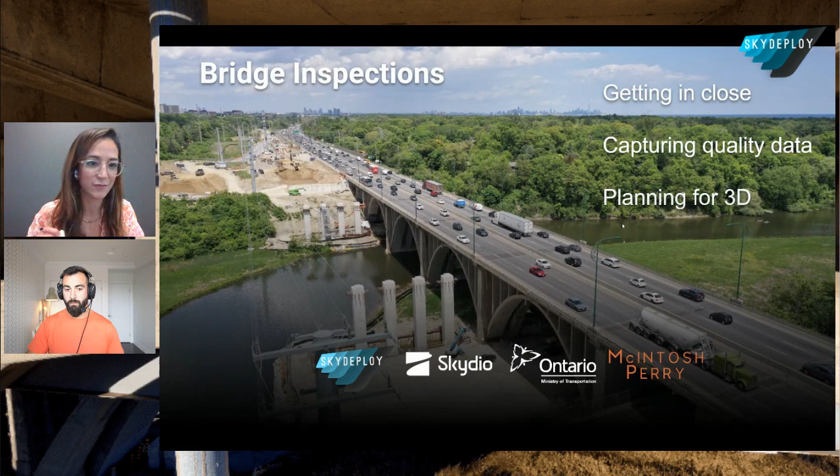So you've been doing bridge inspections for a while now, Ted. How did you get into this, and walk us through, as a drone service provider in Canada? So we're a drone service provider, we do the boots on the ground bit and the data side. The bridge you're seeing on the screen here is actually the first one we inspected with a drone, and we're very thankful to have amazing clients like McIntosh Perry. And this was actually the first time that the Ministry of Transportation, basically our DOT here, did a full scale, complete drone bridge inspection.

So we learned a lot from that, and that was 2 years ago, and we've been doing them ever since for both McIntosh Perry and Ontario, and we keep learning more. Bridges are my favorite because they're just so different every time, and they're so complex, and they're also so vital to our infrastructure - there's just so many of them. So that's basically how we started.

Do you have any kind of examples of the type of bridges you've been inspecting in the last - yeah, I got about 5. So this is the stuff that I'll go through in the presentation, and there's a lot to talk about on this subject.

I think we're probably going to break this up into 2 webinars. This first one will focus on the data collection, because that's where it all starts. You've got to collect good data.

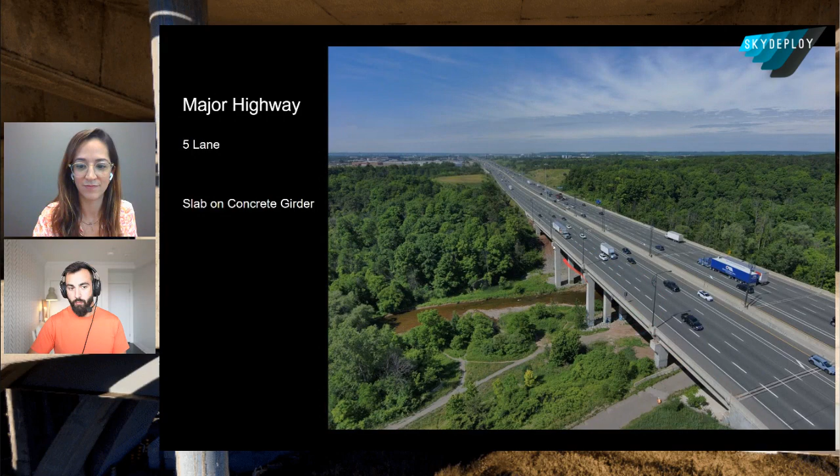So this is an example of a bridge. This is on a major highway in Toronto, 5 lanes, and you can see this is what we call a slab on concrete girder, actually a fairly new type of construction and fairly easy to inspect. But then on the other side of it, we have this 6 lane going the opposite way.

We also did this one. This is a smaller municipal road, and again that older construction style, you can see the open spandrels and the arch. And we actually did a lot of testing there, there's water too.

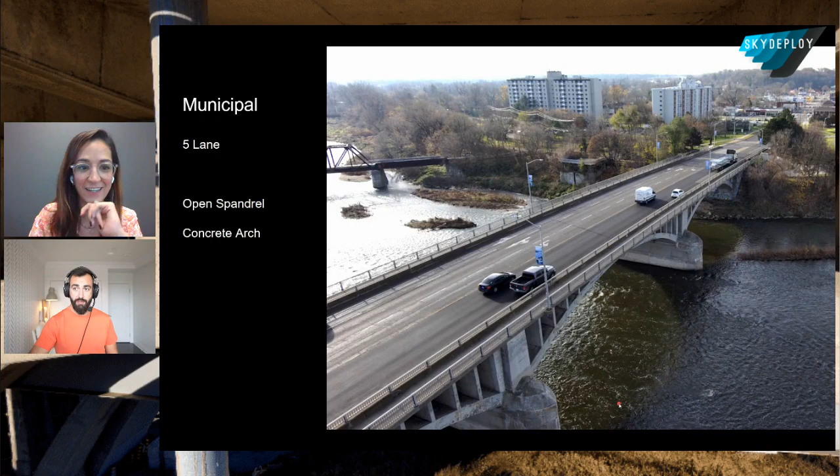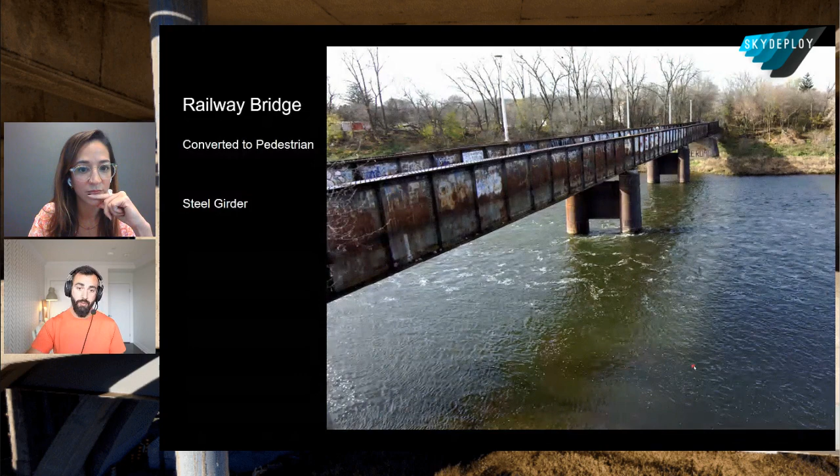Water is definitely a key factor. But then we go even lower, like with something like this, here we have the much lower distance between the deck, and this was actually a railway bridge that's converted to a pedestrian bridge now at a park. So very interesting findings here too.

And then there's this one. This one I go to a lot, it's really close to our office, and I use it for testing out new skills and new things that we got. Actually, the recent one I just tested was the upward scan mode that Skydio just released.

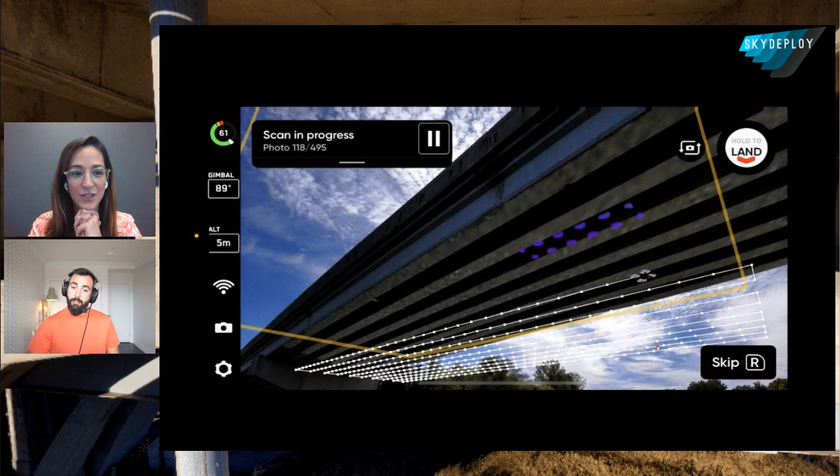Yeah, so this was in the summer release, the upward capture, I think it's called. I got this, right, yes.

So it's basically - you explain it, because I haven't tested it yet. Well, for anyone that's done any mapping with the drone, this is very similar to regular mapping, except it's inverted. Now instead of our camera pointing down, it's pointed up, which is great because the Skydio doesn't need any extra hardware to do that - the gimbal just looks up.

So for us, awesome, because it's really hard to capture this type of imagery if you want to reconstruct it into 3D. And it eventually also optimizes the data capture massively, because you're not exploring a 3D environment, you're just doing a 2D plane capture.

And yes, I'm curious about the results from this because it's quite interesting, the reflection of the water on that - I was really thinking about that. So I've done a ton of testing on this, and I'm probably going to have some LinkedIn posts just about the photogrammetry side of it. But this is the result, right?

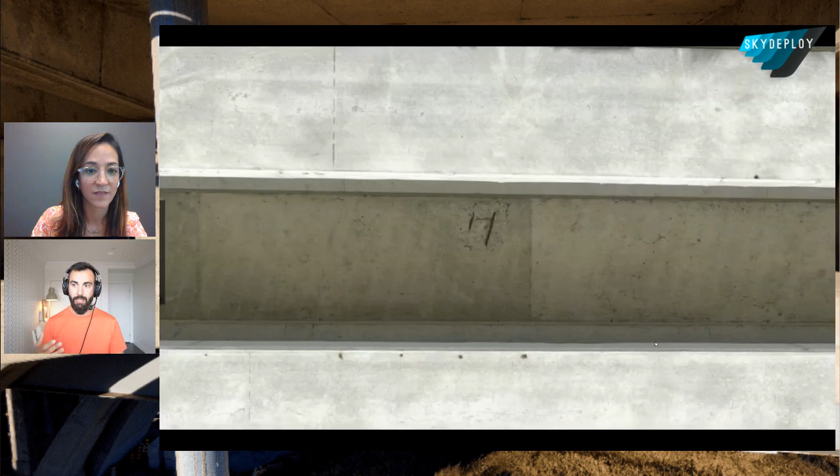So you can see here we have the textured mesh, the 3D model with a texture, visual stuff from the images. But then we can also peel that off and look at just the geometry of the mesh, which is amazing - we can now see how bad that deficiency is.

By the way, typically we're going to go inspect this with video first, find where all those deficiencies are, and then if we want some extra information like this 3D data to be able to measure how bad it is, then we would go and selectively do a scan of those areas - not necessarily doing the whole bridge for the inspection, because we might miss something that way too.

So we're going to talk more in detail about the best practices, but this is just kind of like a preview of this new functionality, right?

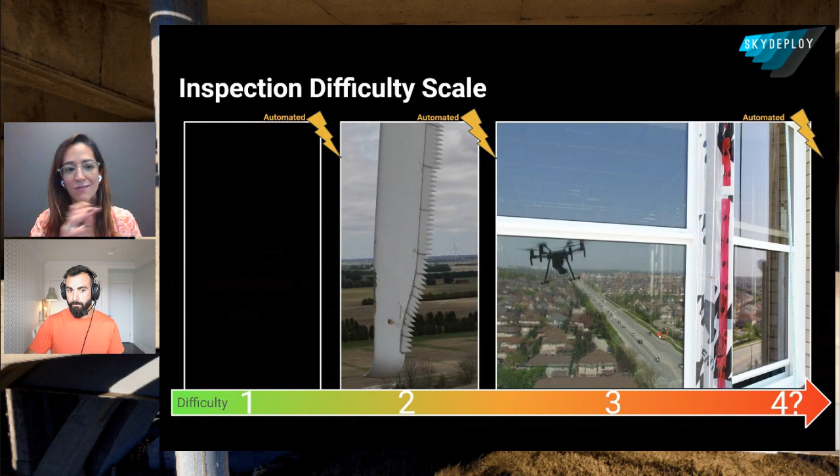Yeah, so we'll go over in detail about the 3D scan workflow, but it's very interesting, that link to the 3D modeling, because in bridge inspection, something I learned recently enough is that it's not only about the 3D mapping - actually the imagery and the video captures are oftentimes the key element of the bridge inspection. So I like that link between the data capture and the final deliverables.

Yeah, absolutely. You'll notice through this presentation I talk about that a lot. We start with video, and then 3D is this awesome value-added bonus feature that we can now do, which is awesome. But in terms of bridges, bridges are hard - I use this scale to tell people a little bit about why they're hard.

We have towers - inspecting those is super easy, I've done a ton. Inspecting wind turbine blades is a little bit more complicated - you got to stop the blade, and there's a lot of technology out there, but it's still more complicated. Then buildings, I'd put those at a 3 out of 4 because there's a lot of turbulence up there, and you've got to cover a lot of surface area.

But the ultimate final boss is bridges, because as you can see from this picture, it's cramped, it's dark - it's not a fun place to be flying a drone. Not at all.

And the first time we did it, especially this bridge, we did it with a completely manual drone, and it was about 8 hours of really, really stressful flying to get this data.

Something that was told to me last week when I was on site on this construction - they are constructing a massive bridge in Sacramento, and one of the guys was saying they had to train drone operators to fly drones manually in such environments.

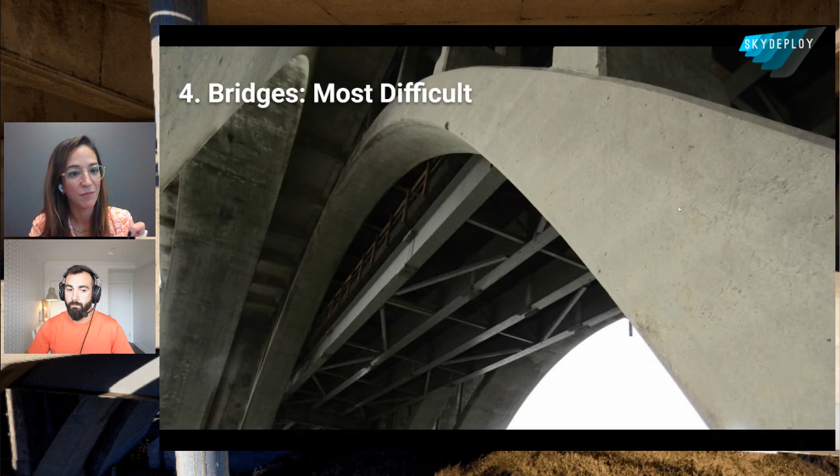Yeah, they're really, really brutal environments. And even once you get the flying done, you need to go find the issues. There's so many of them on bridges because there's so many different materials, joints and elements. So you should be a bridge expert and a drone flying expert at the same time.

So I think the most ideal person to be doing the field work is actually the bridge inspector themselves. Honestly, I'm in the service business, but I'd rather not be the person doing the flying, just because of how much you need to be on the lookout for. You need to be an expert there as well.

But yeah, so this is a little diagram I have just to show why bridges are hard, to get all the points in one shot. This is just a cross section of a bridge, but we're already in a GPS-denied environment under there, right? We're under the satellite's shadow.

We have lots of weird mechanical turbulence. It's usually in an area of depression, because there's a river or something, so we get some weird wind effects there. Close quarters, low light - those are no brainers. And then EMI, electromagnetic interference.

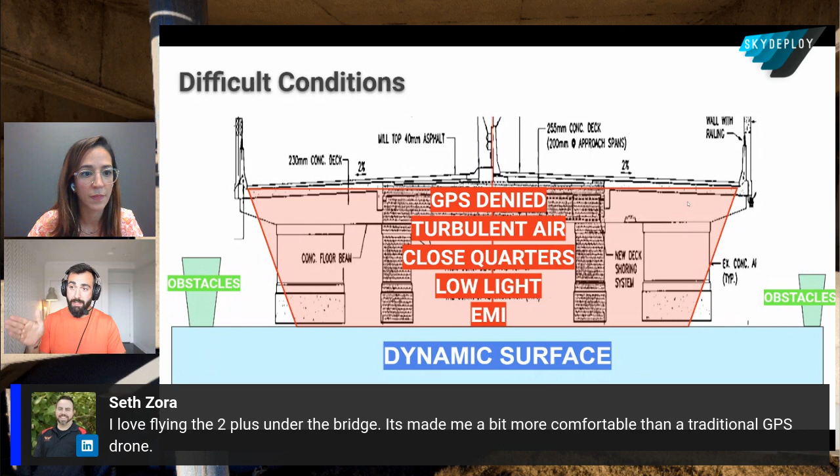The concrete is reinforced with rebar, and magnets don't like big pieces of rebar close to them. So with most drones, they require some sort of magnet inside the compass to figure out which direction they're facing, and then GPS to figure out where they are so they can keep that direction and position.

And then there's also the problem of a dynamic surface, water moving under you. Drones have cameras that point strictly down to see if the ground is changing - that means I'm moving, so correct it. When the ground is constantly moving and changing, that formula breaks down really bad, and then there's obstacles which you could hit. Really, really tough situation overall. Don't like it, don't want to be flying in there unless I really know what I'm doing.

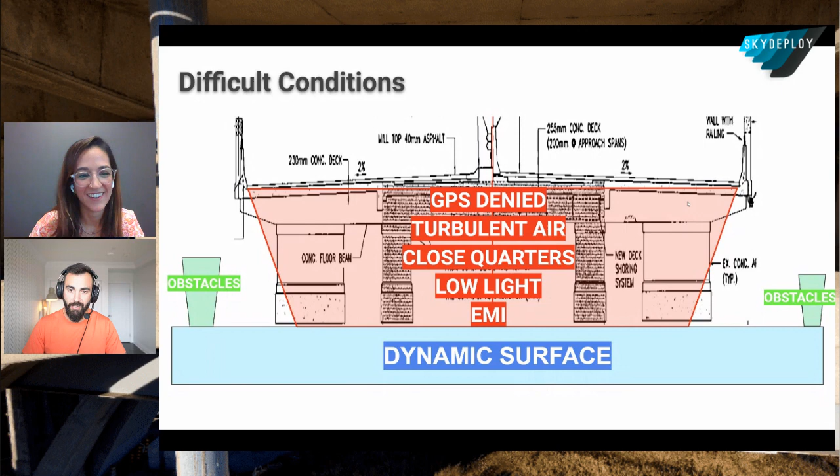So what we do with manual drones is we fly offset - we fly to the side of the structure, and even this presents some issues. We have something called GNSS multipathing.

Essentially, the satellite signal, as it's coming down, we want it to hit the receiver on the top of our drone, but unfortunately it will bounce in some cases off a structure that's nearby and then hit our receiver, which adds a lot of distance. It doesn't look like a lot, but when we're trying to get down to a centimeter or so, this adds a lot of travel time, and it's not a great experience.

This even can degrade our position, right? Even if we're not exactly under it, we can have some compromised positioning even off to the side.

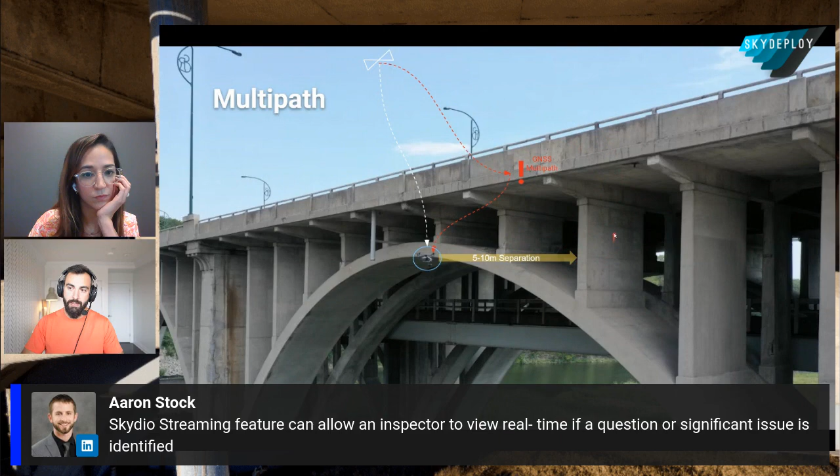So when you look at the manual - we have something here called OSIM, the Ontario Structure Inspection Manual. It's basically the Bible, and this is what the inspectors follow. And right on the manual, it says in black and white, the inspection should be conducted within an arm's length of the element.

And just for clarification, this is an arm. Yeah, just a regular arm. That's a Canadian unit of measurement. When we were preparing the presentation, I was like, is this a new unit?

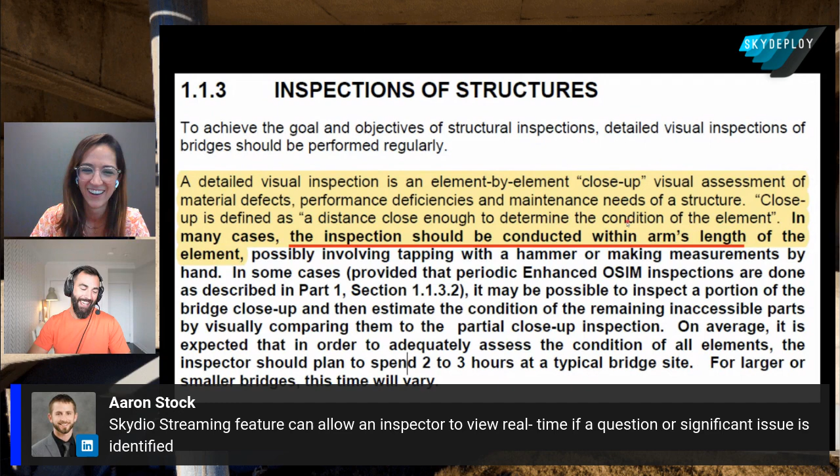What's the unit that I need to learn? Between the foot and the arms, it's not very far. We need to be pretty close.

And what happens when we're looking from the bridge from the side, it gets pretty dark towards the center or middle of it, and we can only zoom in so much. Our camera can only pull out so much resolution from outside the bridge. So we can get the data, but it wasn't great. So this was our experience in the first try.

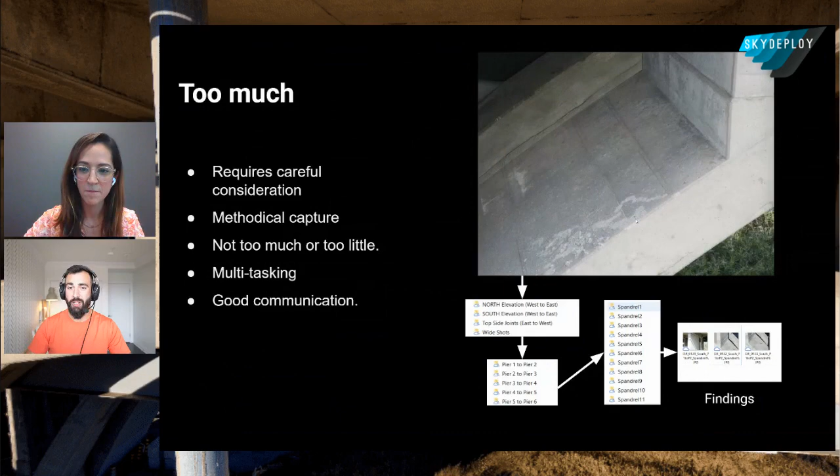And I wasn't feeling too awesome about it. Afterwards, when we got to the office, we had all this data we collected in picture format, and we had to organize it because everything looks the same. Like red bricks on a building here look like red bricks over there after a little while. Same thing with bridges, if anything even more complicated and more important to get right. So this added a lot of time in the office organizing and sorting to make everything make sense of the data.

Exactly, so not a fun experience thereafter. Took a lot of time in the field and at the office, and we had to do it with two people. This wasn't a one person job - one person flying, me, and then a second person taking notes of everything I was saying, what I'd find, so that when we got back to the office we could do that organization. It's a lot of manpower in the field that you can try to reduce if you want to scale this out.

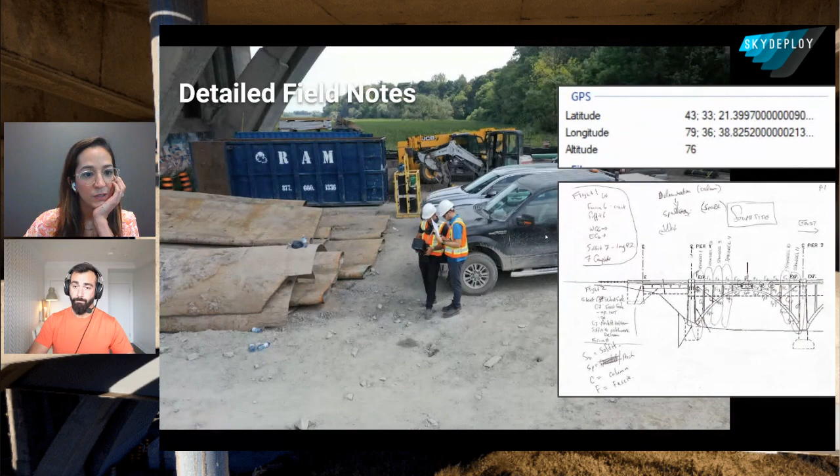So this doesn't sound like a very fun job to do. And then enter Skydio.

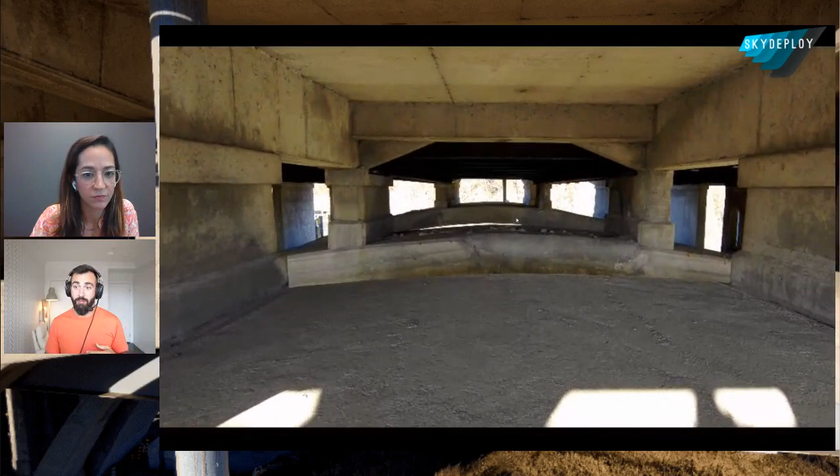The second time we went, I went and bought an S2 just off the shelf. I didn't think it was necessary - I just brought it just in case, to try it really. Then we got it up there and started seeing this, and our jaws dropped because we couldn't believe how stable it was in those areas. We had heard about the obstacle avoidance, but we didn't think it was going to be this good.

This bridge is also kind of funny - it's two bridges. There's an older bridge and then a much bigger bridge built over top of it. So there's actually two layers, and the inner layer is the one we're really worried about because that's the older stuff. So this allowed us to really clearly see what was going on in there.

I think the first thought for me is basically safety and removing the stress from the drone operator. Last week someone mentioned they wouldn't do this without a Skydio because their drone crashed - any other drone will crash easily in this environment. We are not saying we solve all the challenges - lighting is definitely a challenge, someone mentioned that in the comments. There's definitely an element that makes it a very harsh environment to fly a drone, but nevertheless safety comes to mind, and the fact that you can put a Skydio in anybody's hands and they'll be able to get some quality data in this environment, in these circumstances.

What else would you say about that - you brought up light. I've never encountered a situation with Skydio where we didn't have enough light to navigate, and enough light to visually see in the inspection what we're looking at. It does a really good job. Maybe you've been lucky enough, but I do know this is a challenge in other areas and environments. But I could see that.

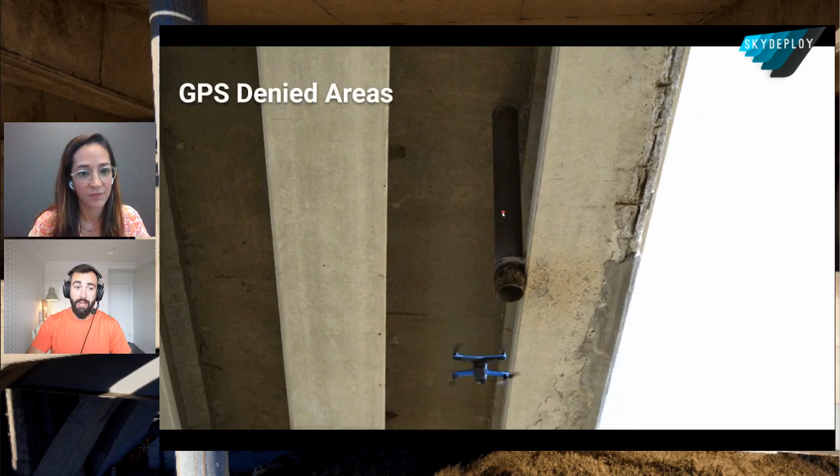We acknowledge that. With GPS denied flight though, that's the biggest thing - that's really the main thing we're after, because we want to get into really tight spaces with 100% no GPS signal down there. And then we also want to do it safely. So the autonomy that's always working is huge - it's not allowing us to crash. We could try to put it into a wall, but it will hold and stop and hit the brakes, and then we can always switch into those navigation cameras it uses for that autonomy and get a live view.

This is also a really nice feature where instead of moving the drone around to see exactly where we are and where to go next, I can just push one button. You have a sense of where you are at all times, which I love. That helps navigation a lot.

EMI immunity means the drone is immune to anything that would cause a compass or magnetometer to malfunction. That means we can get into structures with a lot of metal, a lot of steel - something I would never really be able to do with any other drone, even out in open space.

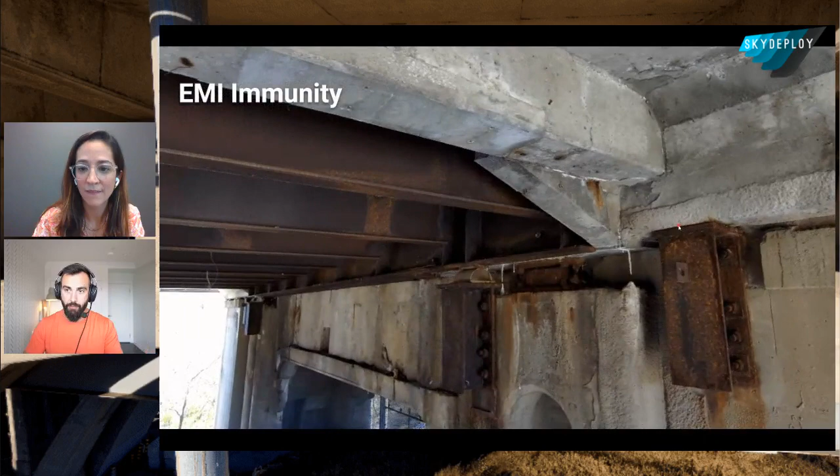I would be careful with it in this situation. Most drones won't even take off if you're too close to metal.

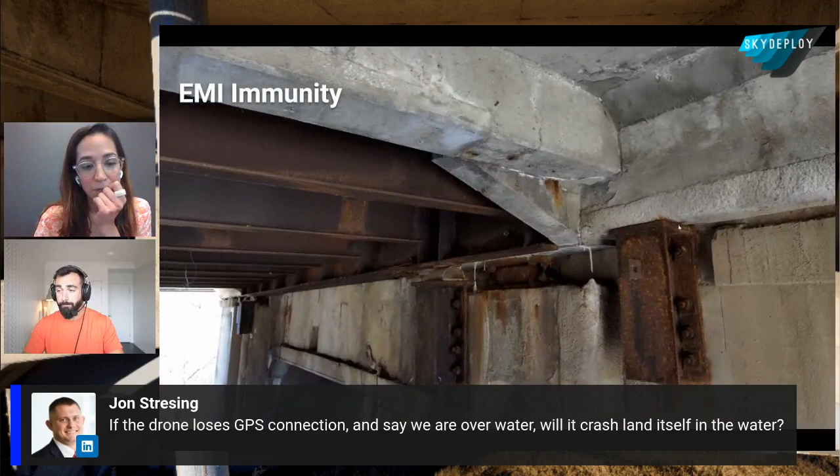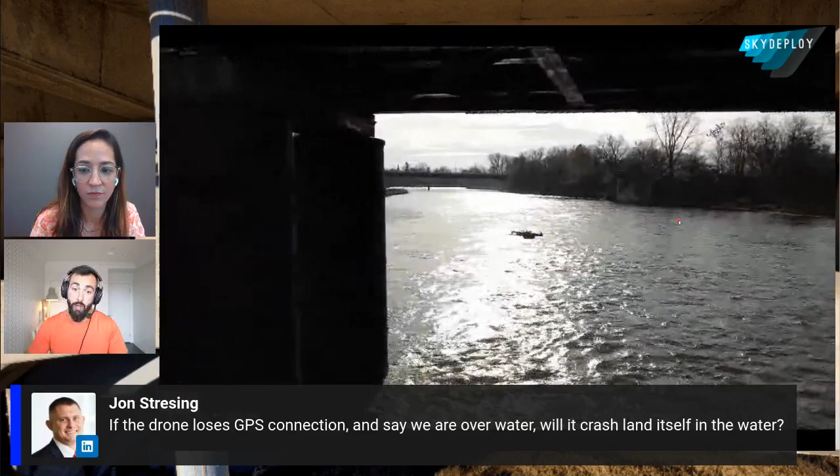I want to read this comment - we had a few questions regarding flying over water. If the drone loses GPS connection over water, will it crash land itself? How has your experience been? You've shown a few pictures of bridges. Here's a bridge - this pedestrian bridge that's very close to water. This is how we're doing the inspection, taking a video, seeing everything, running through, and this is how close we are to the water.

I wouldn't be confident to say that we have a GPS fix here - probably a minor one, but not as safe as I'd like. Because there's a bridge over us and the Skydio is looking 360 degrees everywhere, as long as that bridge doesn't move, it still has relative positioning. I think that's how it's dealing with the water so well.

Still water is a massive challenge because of the reflection and different issues. Moving water is your best friend in this kind of case - I think that was a good example. It's a beautiful video, by the way, Ted - I really like this video. But yeah, it's a challenge nevertheless, so we can't say that water is easy peasy.

There's always edge cases, but I've never seen a bridge over completely still water, and I'm always up close to the bridge anyway. If I was flying in the middle of the ocean or a lake, I would maybe consider it and be careful, but you're probably not going to lose GPS in that environment anyways, so it has that to fall back on.

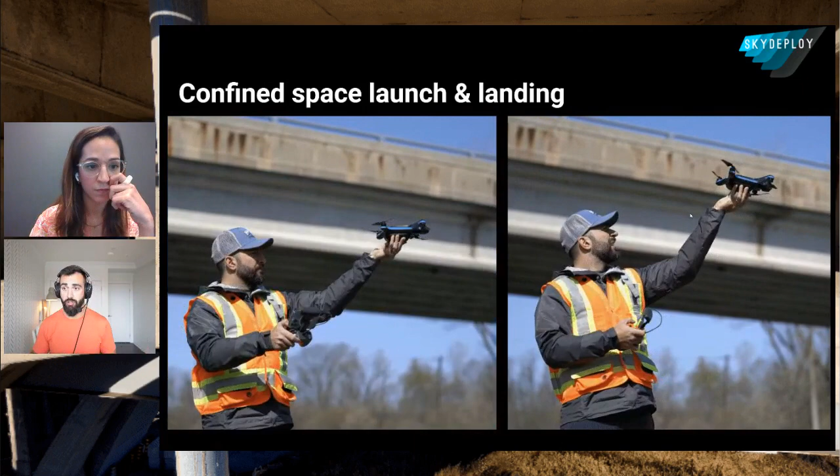I have a few examples of some really tight spaces we got, but one thing I also love is the ability to just hand launch and hand catch. Like when you were at a site with a bridge being constructed, there's not much space, it's really dusty, and you don't always have a position where you can set up and take off from.

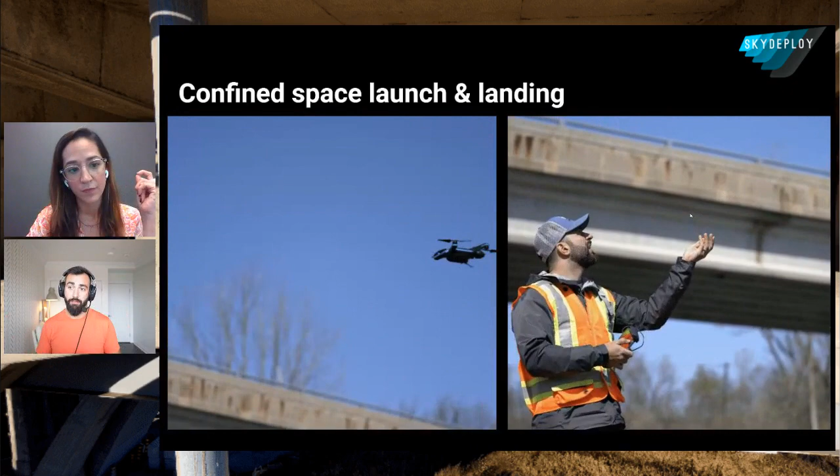This has been huge - let me add that with the latest release, you can do that by pressing the battery switch-on button, I think it's 4 times, and then you can launch from your hand, so you don't need to use the controller anymore, which I think is a massive advantage.

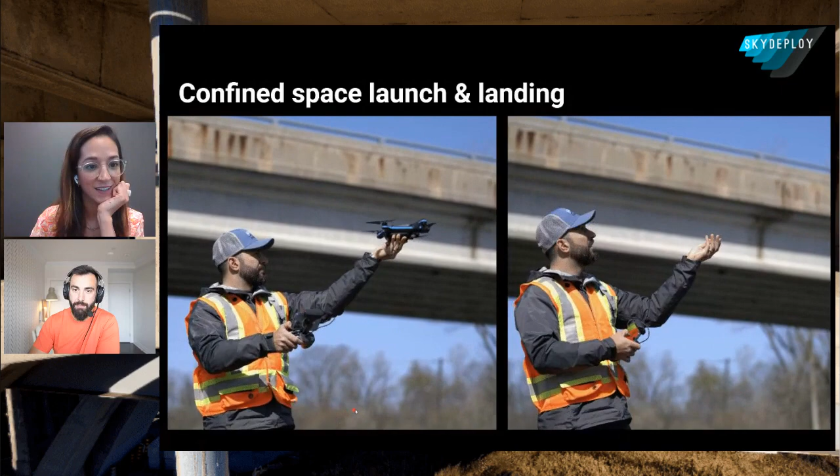I'm looking forward to trying that, I haven't tried it yet, but you can see one hand's on the controller because I want to make sure I'm hitting that button - I can get a little clumsy sometimes. Exactly, so now you wouldn't have to have one hand pressing the controller, it would be just only on the drone.

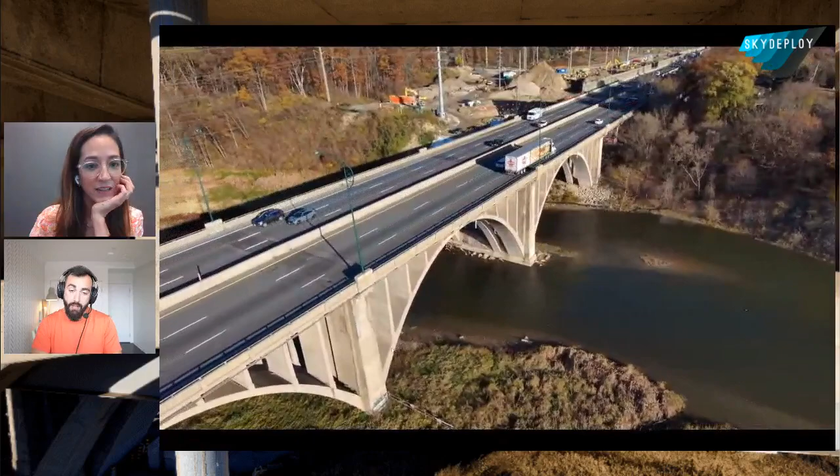So here's again that first big bridge, and this is a video from that first time. Traffic is flowing, nobody knows we're doing this. We're not disturbing anyone, and we're under the cars, so very safe. We just pop in there and start poking around, looking at everything that's interesting.

This again is the autonomy here, the obstacle avoidance is working. It's doing its thing, but I am controlling the drone in that case, right? So it's not flying itself. I haven't told it to do anything like it does with 3D scan, for example.

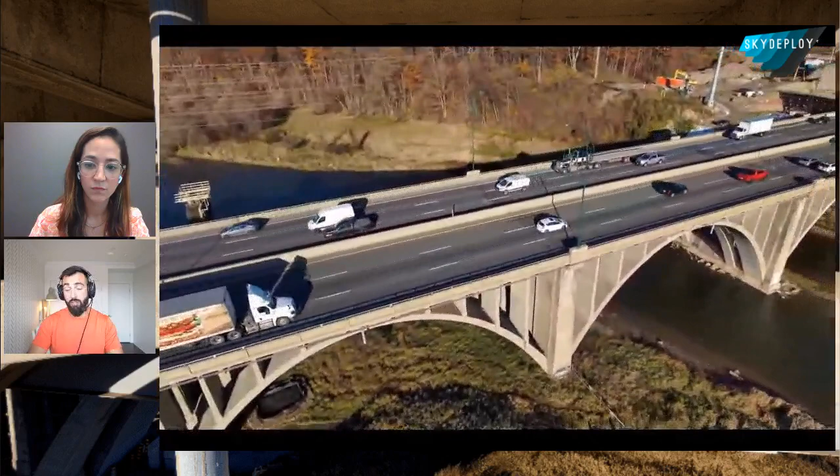And the same thing here, this is just a more constrained area that we're trying to get into. What I find is the Skydio, you ask it to go forwards, it'll take a moment, it'll figure out its surroundings, and then if it likes it and if it thinks it has enough space, it'll pop through.

So there's really no ambiguity. You can definitely, once you're used to how it flies, tell what it does like and what it doesn't like, because it takes its time with areas that it thinks are a little too tight.

And tell me, what's the data that you are capturing, because obviously this all sounds like very hardware— yeah, okay, we have a very good piece of hardware and software obviously for the autonomy, but tell me about the data you're capturing here.

Well, there's really no other way to capture this data unless you have what we call a bridge master, that reverse boom lift. We're gonna get close, but you're not gonna crawl through that space. And you can see in some of these cases, we can't go through those spaces either.

But it's definitely more than enough, and it's way better than what engineers have been doing thus far with the options that they've had, right? Plus, nobody's in harm's way. It's super safe, it's a small aircraft, and even if it does touch the bridge, it's not going to do any damage to it. And I'm not out tens of thousands of dollars, right?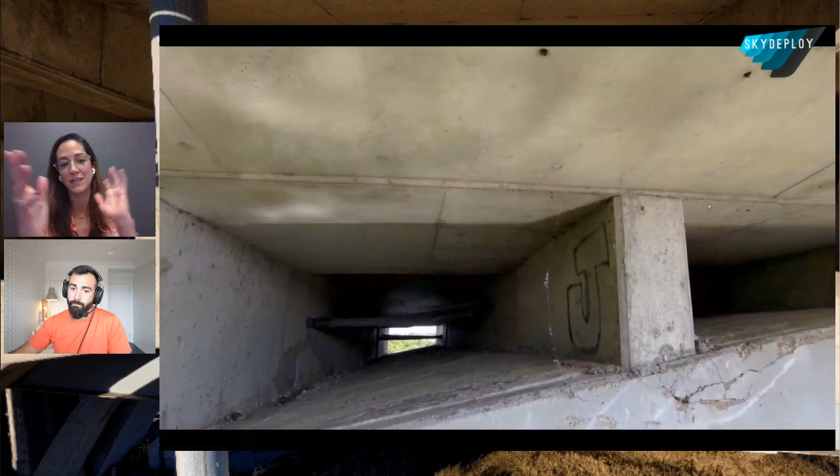So the go-to capture distance, and I also want to ask about the safety distance to object, I think it's called, or what's it called? What I like to do is with a visual inspection like this, is get wide shots and close shots because engineers ask us for this.

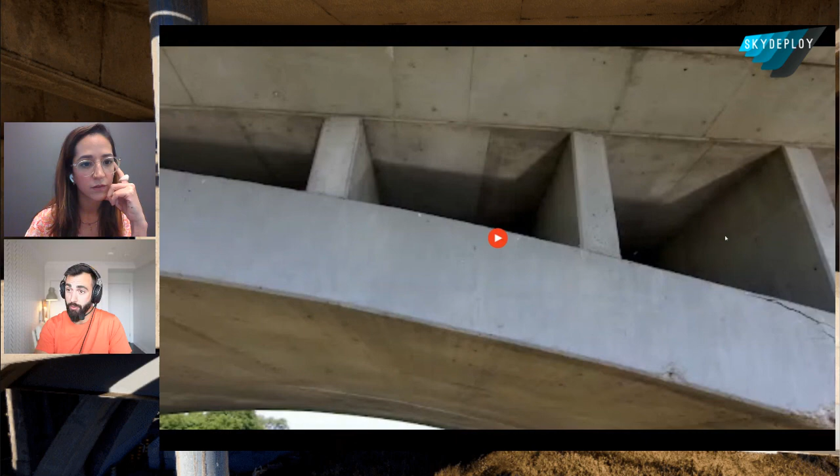They want to know context. The nice thing about videos is that they can just watch it through and they don't have to really do anything except watch in order to figure out where they are.

But if there is something that's really hard to see, we can get up to, I think, 3 inches with the close obstacle avoidance, which I actually don't ever use, because what you're seeing here in this video is very compressed. The raw 4K video is incredible and you can extract frames from it, like pictures if you want.

So three inches is about 7, 8 centimeters, something like that. Yeah, yeah, yeah, so it's more than enough. Generally, because the video is so good, it's fine.

Now, if we're doing a 3D scan, that's a really different situation, because if you were doing a 3D model, that's probably because you want to measure something. Just want to make the clarification for people not familiar with the 3D scan: it's the software that Skydio provides for the data capture, and then capturing that data for 3D mapping, 3D modeling in photogrammetry platforms.

So we'll talk about this soon enough because we are 25 minutes in. But yeah, so it will be— so safety, tell me again about the distance to objects. So there is, the thing with bridges is a little secret for everybody, and a lot of people here are engineers, so they understand this. It's not like if we're looking for really high resolution stuff, it's probably because you're looking at a crack.

Nobody really cares about the length of the crack, it's all about the width of the crack. That's what defines the severity in their inspection manual. So if we were doing a 3D model, I would be interested in getting as close as possible. But if I'm doing a video, which I can't measure from anyways, it's not super important that I'm that close unless I absolutely have to be.

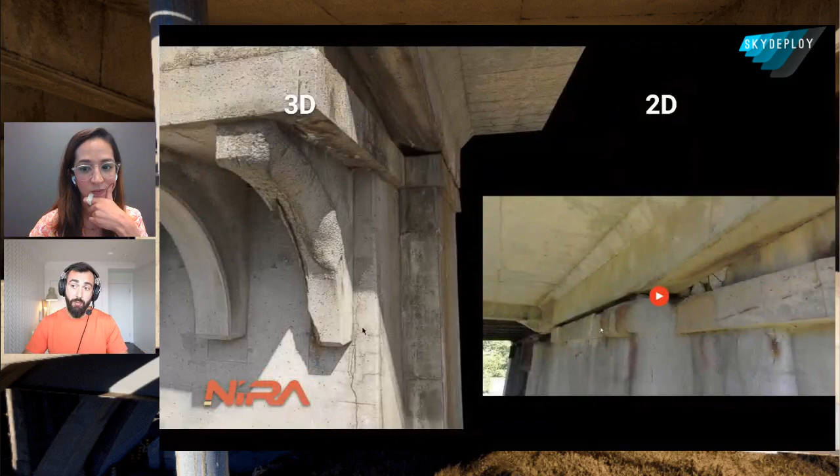And you can see here we're behind the pier. The pier is actually hollow on the inside. It's very dark in there, and even the video is really, it's perfect, more than enough in order to see that information. We're not going to essentially always be 3D scanning all the nooks and crannies, but for areas that you do, you have that option, and it's on the same hardware. You don't have to pull out something else, it's right there, it just takes a minute to set up and change between the modes.

There's a lot of comments coming in, so I'm focusing on the conversation rather than the comments, but I'll follow up, and I know my colleague Andre is also helping with this, so bear with us. I've seen a few comments around control points and tie points. Maybe I'll talk about that coming up. That's a good point. I see we have some people here that know what they're doing, so I love that.

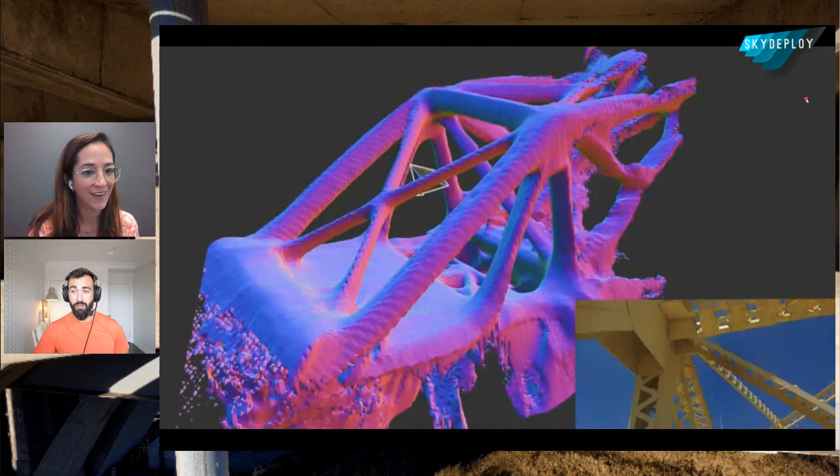If you want measurements to be accurate, you should have them controlled, right? Everybody knows that, and there is a way to do this with bridges as well. I've seen some comments about laser scanning, and I agree, laser scanning has a lot of value, but the tough thing about laser scanning is it doesn't provide you inspection, doesn't provide you visual information, it just gives you the structure, a point cloud. And even if the drone had a scanner and was doing SLAM in the air and making a nice map, for an inspection purpose that's not valuable because I need to see physical colors, and point clouds don't give me that very well.

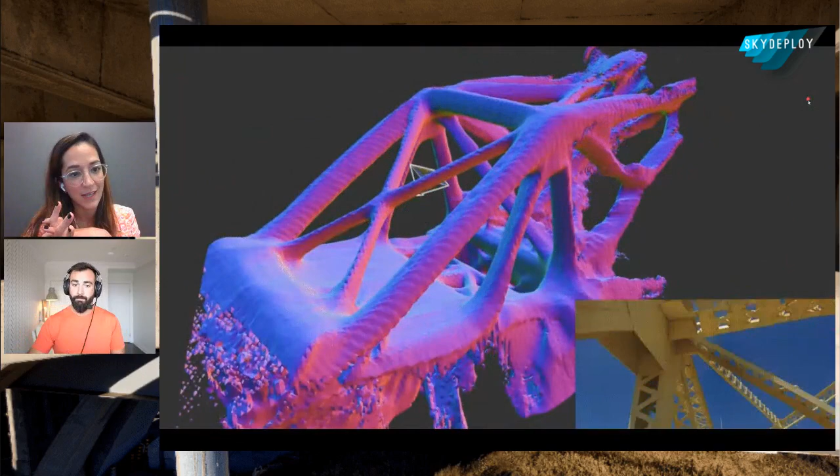So when it comes to control points versus tie points, if you don't have control points, obviously your data is not going to be geospatially accurate. You're going to have relative accuracy, which oftentimes is enough for volume calculations or measurements in a relative space. But if you need geospatial accuracy, absolute accuracy, you do need control points. And we will cover a few best practices.

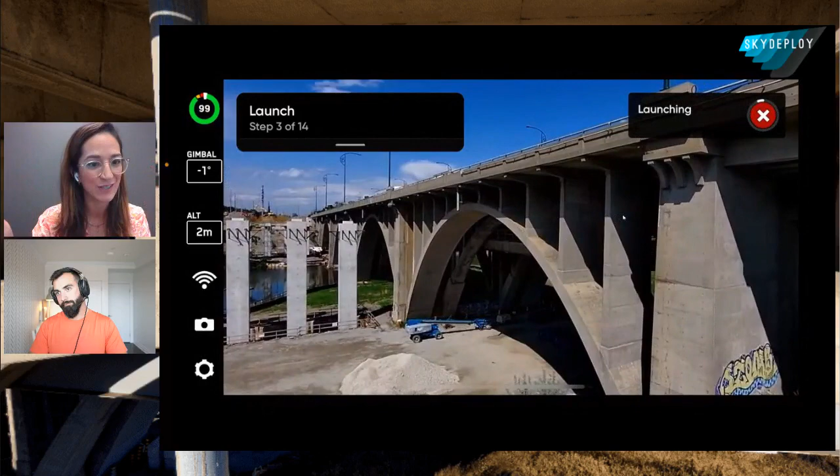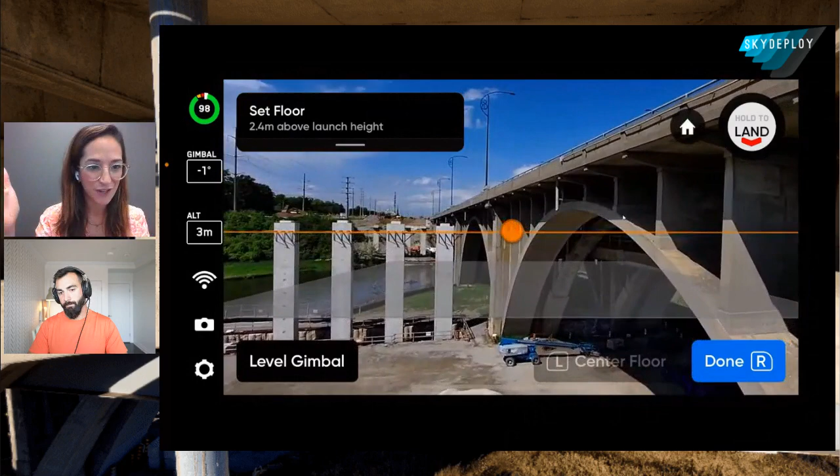I agree with James when it's necessary. I also think that sometimes relative accuracy is good enough for certain applications. So it always comes down to what you need to do in the office with that deliverable, and then reverse engineer from there. So when it comes to things like overlap and tie points, think about the requirements for your final deliverable, and then plan your mission accordingly.

Plan ahead, yeah, absolutely.

So here is 3D Scan being done. This is just a screen recording from my iPhone, which was running on the controller. So you are using your phone on the controller, and this is the application - 3D Scan, the data capture application that Skydio provides, and this is kind of like the workflow that you do for that 3D capture.

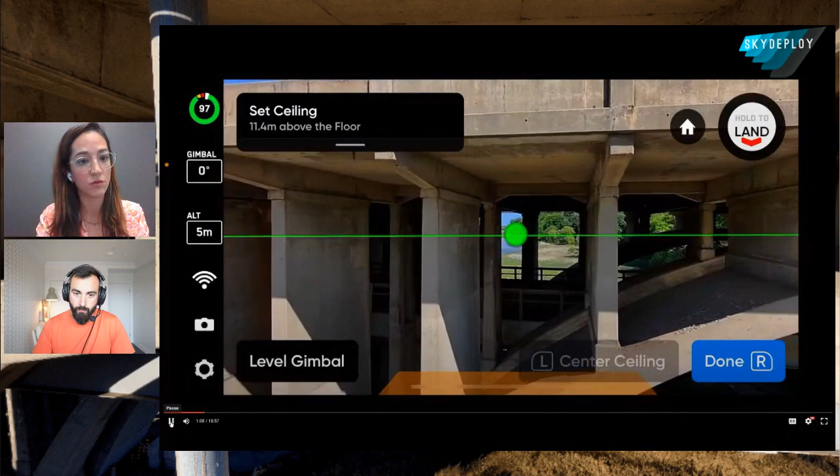So the way that we run out in the field, we have one Skydio without 3D scan and then the other one with 3D scan, and we have both of them on the autonomy enterprise so that we have closer obstacle avoidance and upward view. We do the inspection with both, and then the areas we need to 3D scan, we send out our 3D scanner Skydio and do this part with it - what I was doing in the field after we finished the visual inspection to model this.

Sorry, I remember now what I wanted to mention in terms of the challenges - it was the geofences, so that you don't fly over the bridge, or interfere with traffic.

Let's talk about that specifically because I've seen some people with questions about geofencing. So the floor could be important, especially if there's traffic underneath you or pedestrians - you probably don't want to be doing this in that case, but it's there and it's helpful. The ceiling is the most important, because again, there's traffic up there.

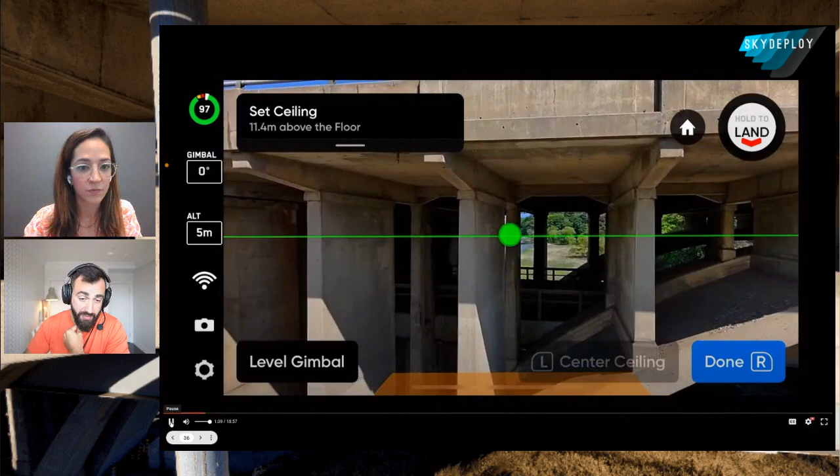This is a really great way of setting a max height, so that the drone never breaches this altitude. And I love this because it's not like you're flying the drone and you see it - because my sight is really bad, so I fly the drone and I'm like, okay, you're at the exact same level that you don't want to fly over.

And then you set that, and you can also interact - so what you're seeing on the screen is basically that interaction with augmented reality. You can touch the screen and also modify that if required. I'll show you that in a second.

The thing for me that I love here is that I don't have to type in a number of how high I think the deck is. I need to measure it somehow from my launch point, which can change, and I have to redo that and then plug it in. This is just visual - this is literally where the drone is. Don't breach this altitude, and I love that because I can very quickly do it, and I can be assured that it's going to stick and be in the area that I want, without actually having to find out later.

Someone asked why there's no wind in this inspection, but there actually was a lot of wind. I was reading that and thought, oh no, there's going to be a lot of wind. That's the thing, it's always there. Even on a really calm day, there's wind inside of or underneath a bridge. It's crazy.

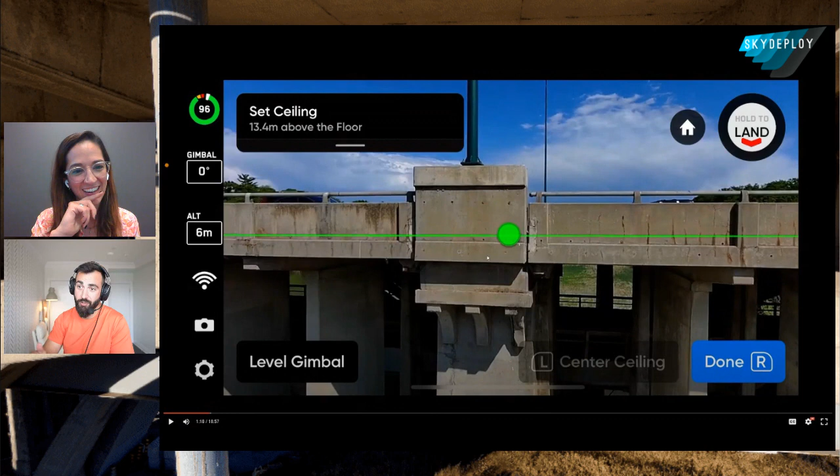Once you see the S2 plus flying in wind, it's pretty impressive how it navigates, even in windy conditions.

So let's go through this. Here we're setting the boundaries for the 3D scan, telling it what area we want to scan inside of. Again, the autonomy is working. I can freely fly through the bridge to set these points, regardless of my GPS lock or not. It still knows where that point is because it's mapping its environment in real time.

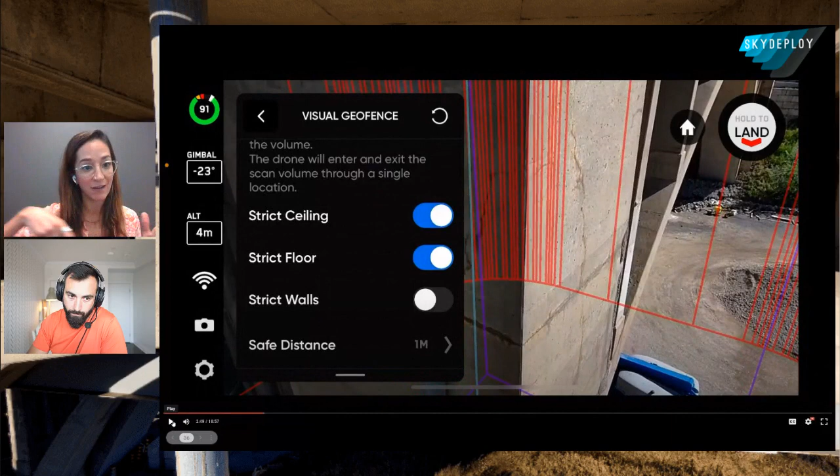So what you're doing here is basically flying the drone, defining the volume of your object of interest. You're setting those pillars which will define the area or volume of that object within the object of interest. You fly the drone, and with that augmented reality and 3D scan, you set that boundary between the screen and flying the drone. I love this, I think it's a very easy and intuitive way to define your area of interest.

Very easy. The other thing here is you're starting to see these settings for the geofence. So strict ceiling, make sure that one's ticked on. Strict floor can be optional — I do it in this part because there's some machinery there. First of all, I don't want to map that stuff, and I don't want to get close to it. Strict walls I don't check on here, which I probably should have, and you'll see why.

At this stage I'm ready for it to just go and explore. I've told it a boundary of volume, but it doesn't know what's in that volume, it has to go figure that out by itself. Every time you do this you could get slightly different results, but this part always impresses me — we're fully autonomous now, so I'm not controlling the drone. It's exploring, doing a very quick flight to get a sense of what the object of interest is like, and then it comes back to you and says, okay, now you can define the overlap.

Oh, what's happening here? So what happened is, if you notice, there was the pier I'm interested in, which is inside my volume, but just outside of it is the spandrel — these vertical columns from the bottom chord to the top chord of the bridge. It went behind it during its explore phase and basically said, if you want me to go across and back to the area you're interested in, I need to break that geofence, I need to break that wall.

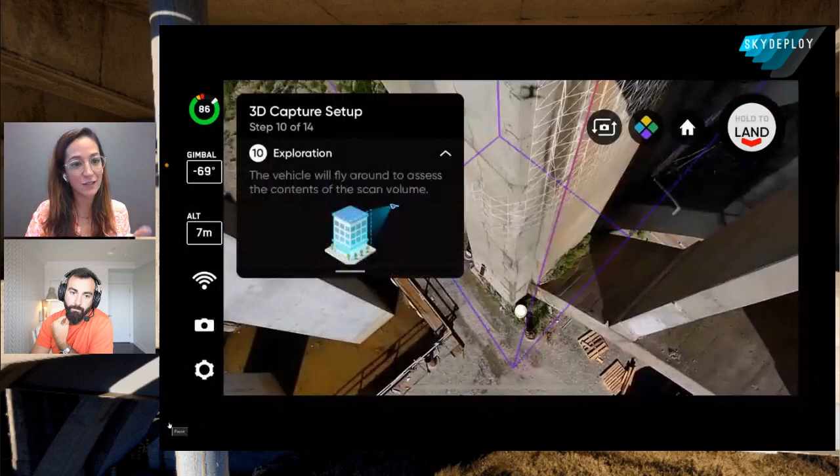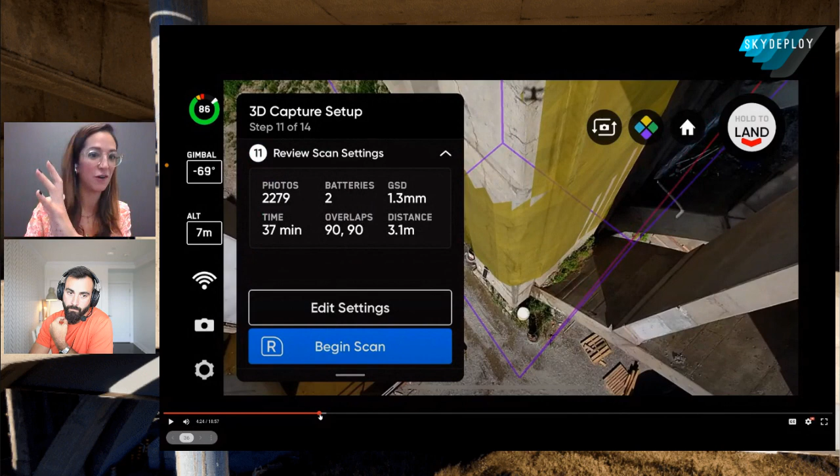That's very interesting — so you could ignore the geofence, meaning, well I wouldn't do it in this environment obviously, but you could if it's safe to do it. You took over manually, and once it got back to recognizing what it was, it continued. This is also a very unique example with bridges — you're really not going to see this with structures or towers, because there generally isn't anything too close to you. Bridges do have this situation, so again, that's why they're hard.

What I also did here is after I got back, after it completed its explore, I realized it didn't do a great job because of that whole thing that happened, and I actually told it to go explore again. But as I go back here to restart exploration, you'll notice that mesh over the structure is still there, so it's already retained. It hasn't thrown everything out, which I really appreciate. It makes this step a lot faster because it doesn't have to start from scratch. That's interesting, I've never experienced this. This is a really good trick, best practice, very helpful to know that you can just do that.

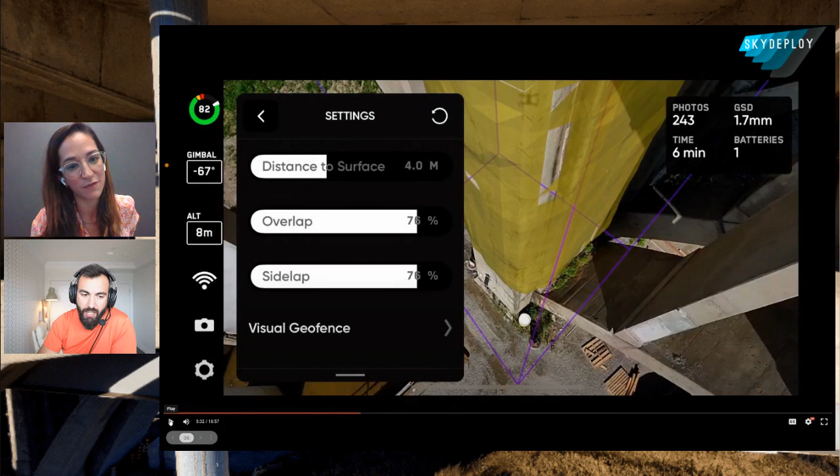So here we go, now I set up the scan. Let's see if I do something controversial here. Okay, that's 76, fine. In fairness, that bridge's surface is quite easy for the photogrammetry, like concrete, except for the light conditions, shadows might be a bit tricky. Good point. Also, the material isn't reflective, so photogrammetry works well.

So 4 meter distance to surface, that's gonna give you 1.7 millimeter GSD, and you're gonna use only one battery. So I'm looking at the right side of the screen, that's where the 3D scan tells you, okay, I'm gonna need like 243 pictures, 1.7 millimeters, 6 minute flight, and one battery, and it's gonna do that fully autonomously. You're gonna just fly, and it will go and capture data on its own, easy peasy.

So I want to keep it to about a battery, and now I'm adjusting the distance to get some more photos. I thought that was a little too fast, and we have a lot of battery, I don't need it to be done in 5 minutes, so let's get some more resolution. Now it's at about 6 minutes, and then it starts collecting the data that we need.

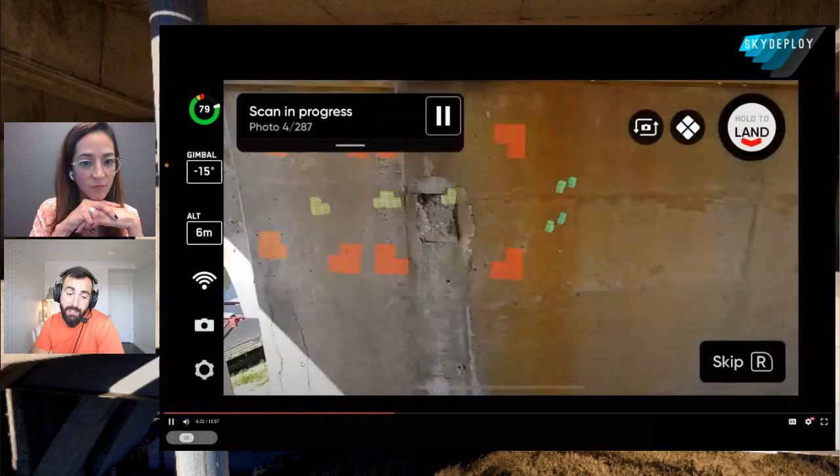So it does this for the entire section that I requested, and then at the end it also asks me if I want to do some manual data collection, which I actually did in this example because I wasn't happy with how low I set that ceiling. I should have probably set it a little bit higher next time. But you always have that option to do some extra.

It's also interesting, like I know for you, one of the key elements in the field is optimizing the battery time as much as possible. Obviously, time is money, and when you're in the field, time is crucial. But it's interesting that you also find a compromise between overlap and GSD. So knowing your requirements, if you're looking into, for example, no lower than 3 millimeter resolution, you can play around with that overlap and GSD size to get the best possible flying time, capture time.

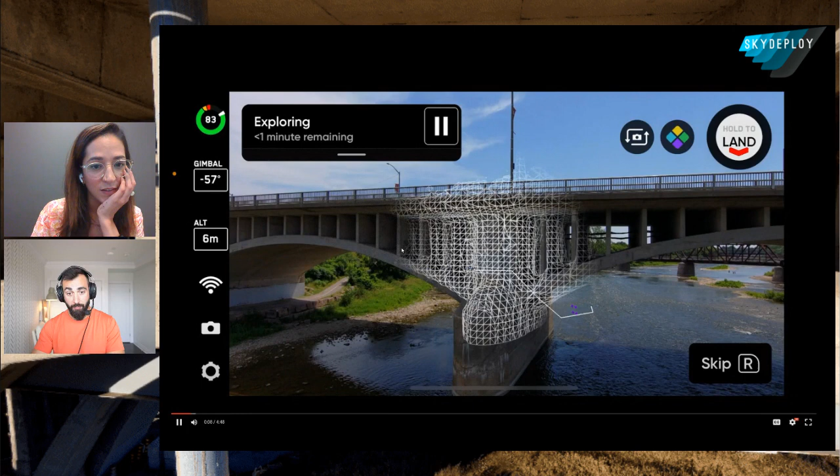So here's another example of that other bridge, the municipal bridge, more complicated. We actually did a much larger scan, as you saw in that plan phase. But this is what I mean: you want to be in the center of the pier and halfway out in the arches, so that you optimize that flight pattern. It's not flying across the bridge to get from one slice to the other.

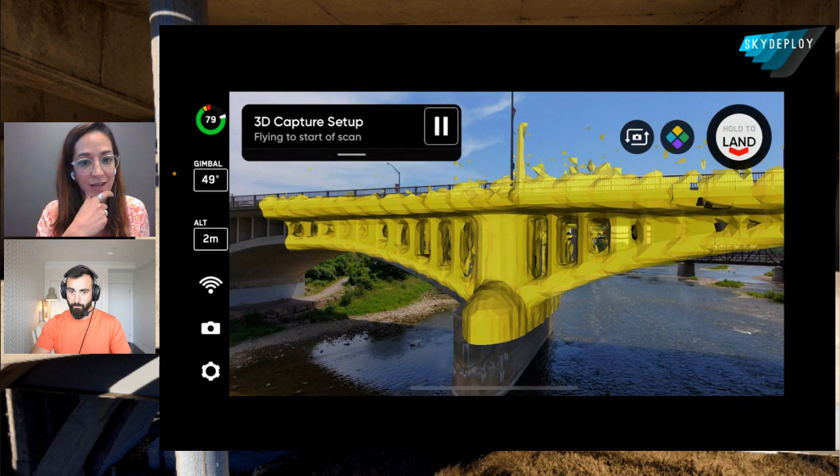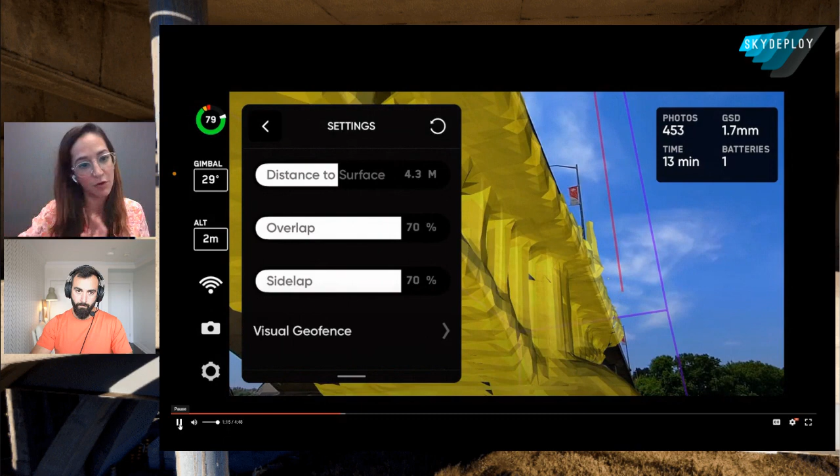So just very briefly, and we need to wrap up in about 5 minutes. Something I really like about this view is the coverage. So while Skydio is doing the 3D capture, you have a couple of views that will toggle between the coverage - that means the overlap that is capturing the data and how the overlap grows - and then also the flight plan, the flight path, which you saw in the slide before. So you at all times have a sense of where the drone is flying and what data is being captured.

So here in this example, looks like I used 70-70, and distance 4.4 meters gives me a resolution of about 2 millimeters. So when I'm thinking about the cracks, I'm thinking about what is probably the smallest unit of measurement that I would like, and here we're going to get about 2 millimeters as our smallest unit of measurement.

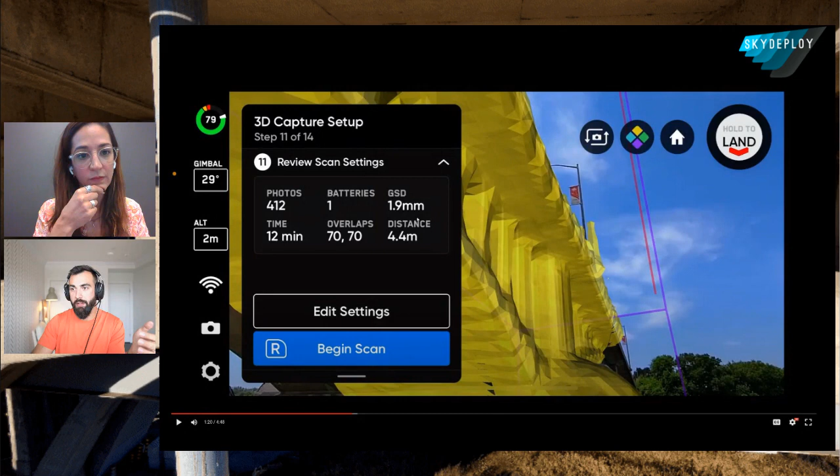That's essentially it. After you set this up, the rest is all the same, doesn't matter what the 3D scan object is - bridge, space shuttle, same thing. That's again the augmented reality. Those squares are where the pictures are taken.

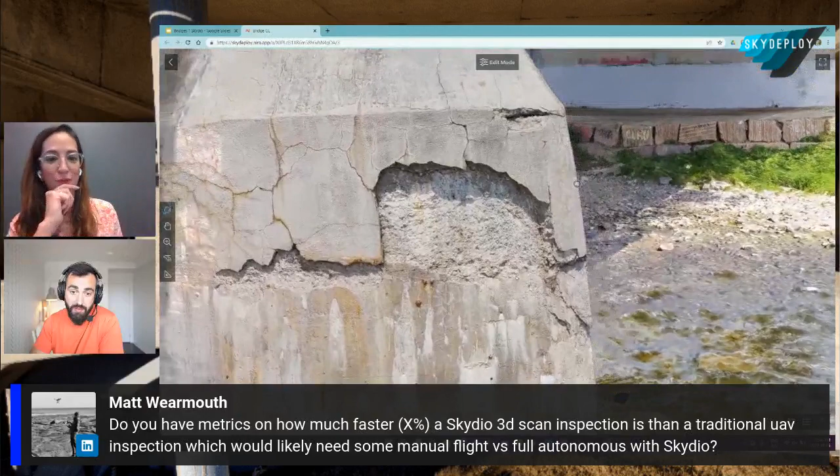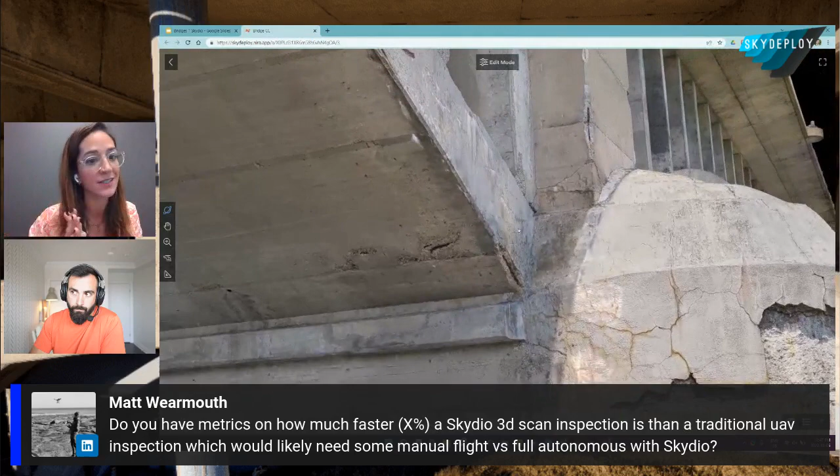I want to mention we're going to be covering all the photogrammetry, so data processing, photogrammetry, and 3D modeling, and some BIM applications in a couple of weeks. We'll continue the bridge inspection but from a processing angle - that might be a fun one for you and I, being photogrammetry lovers. We'll get into the nitty gritty.

What I want to get across with this is how great having a 3D representation of this bridge now is, because when you see something like this in a 2D picture, you get an idea of how bad it is. But in a textured model, you can flip between textured and not, and see the level of detail we can extract in terms of how bad that deficiency really is. You can see these edges - the abutment here on the pier is where that issue is between these two sections. Super cool.

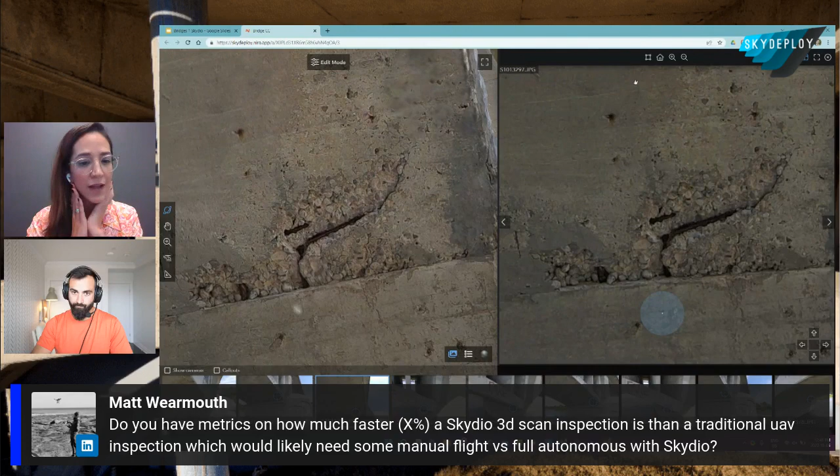Let me read a couple of questions before we finish the live. Matt is asking, do you have metrics on how much faster a Skydio 3D scan inspection is than a traditional UAV inspection? We covered this in the last webinar - Ted did a very good comparison, this is manual flight versus autonomous flight. I don't think we have specific numbers, but I'm gonna check internally and see if I can find any numbers for you, Matt. Thanks for that question.

Mateo is asking, impressive number of photos, good job with manual flight in these conditions - how come you did not scan the whole bridge automatically? Before I leave this to you, Ted, I want to mention that after the 3D scan, it will ask you before finishing the flight, do you need to take any manual pictures? So you can add any manual additional pictures that you can take manually.

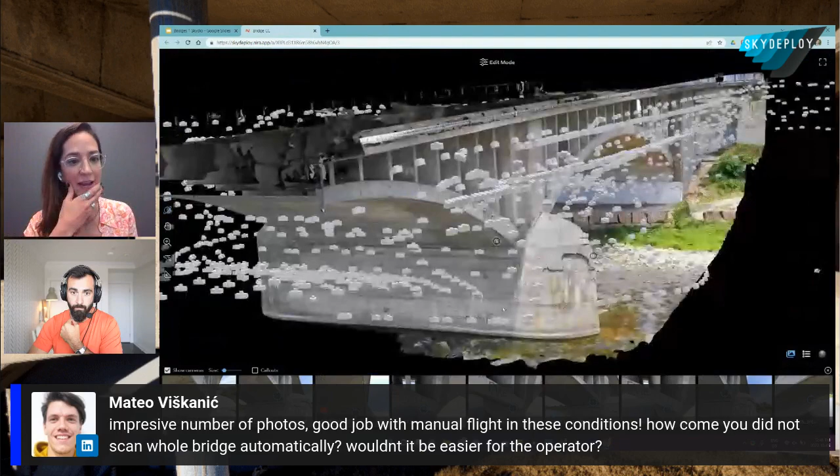Here's an example on the screen of that. You can see the 3D scan images - those are the ones that are really nice and organized and very equidistant from the surface. And then you can see these ones - these are like me completely just smashing the trigger button, making sure I get a lot of detail inside of these spandrels, because that's where photogrammetry starts to really break down, areas that don't have enough overlap. Lessons learned from this one is take manual pictures, and next time I would probably take many more manual pictures of these areas between spandrels.

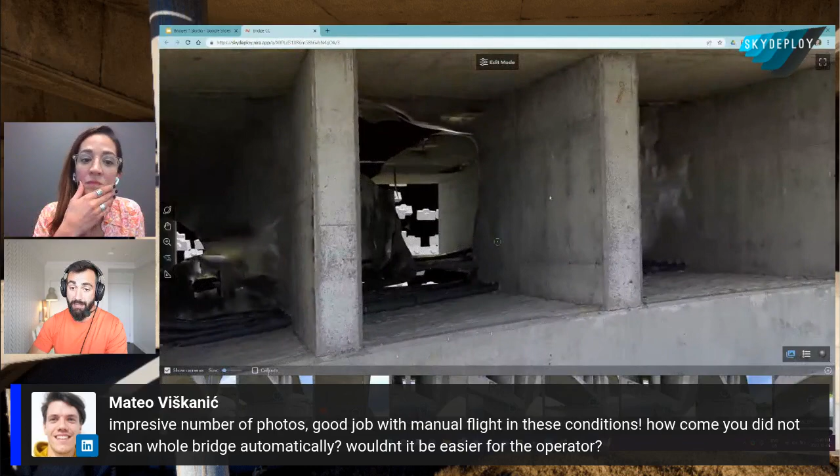The nice thing though is that I still have data for those areas, because since these are just pictures, I can select a camera and then open up the actual photo itself, and I can still see what's going on in there. I can detect any real major issues - it doesn't have to be in 3D. I definitely still have information there. I want to mention also the guys from SkyDeploy, which is photogrammetry software I recently discovered in commercial UAV.

They have a functionality where you can measure on 3D, and it will be automatically visible in all the pictures associated to that measurement, which is really powerful. Being able to measure from 2D images is what photogrammetry is all about. So once everything is aerial triangulated, or AT'd, like what you're seeing with these cameras, we know where the position of the camera is, then you can do whatever you want.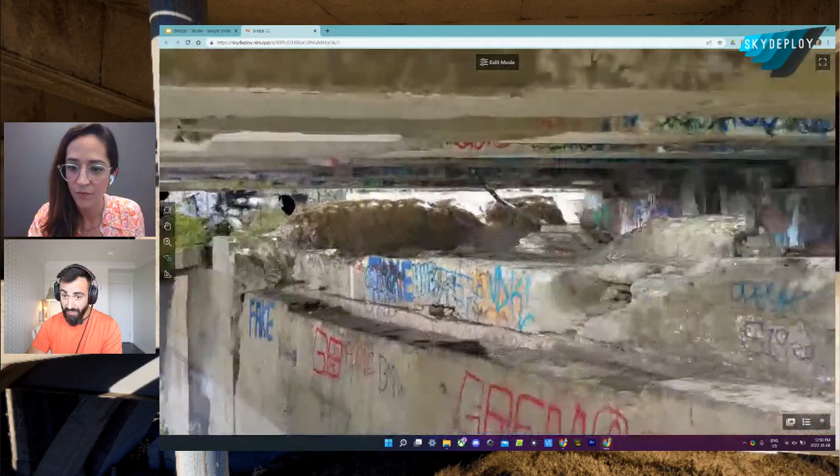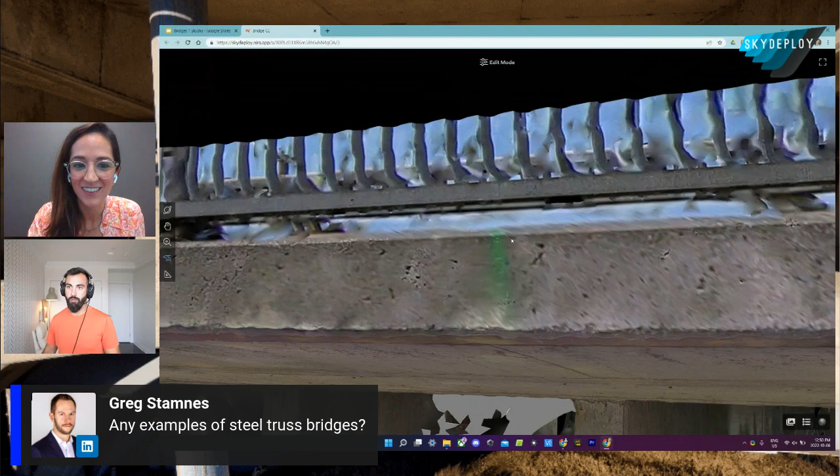And then if you're really worried about accuracy, you go for control points, and then constraints if you really can't get control points. Let me show you where some control points are on this one. It's really simple, see this little green mark. What we did is we just sprayed a little visual spray paint, and then we got that point with a GPS rover, and then we got them at the base as well, at a few different locations. So this is allowing us to make sure that the highs and the lows are all covered by those static GNSS observations.

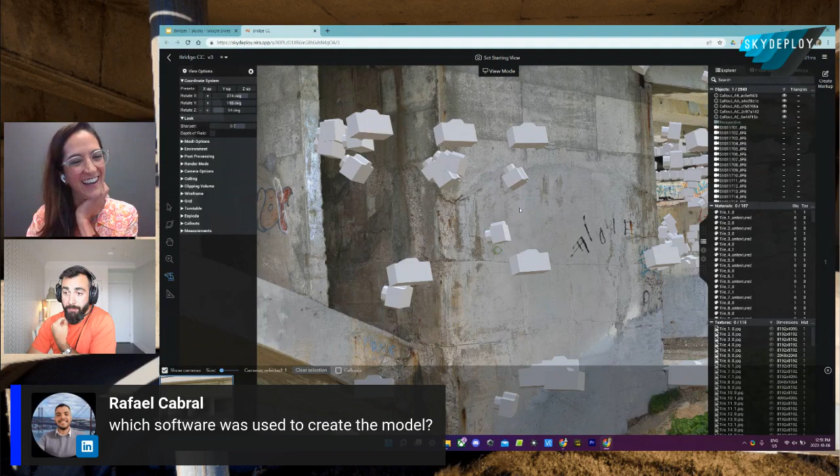I have, I think, 7 of them installed on this computer. I was able to reconstruct this in, I think, 5 of them. So this one, not a problem. There's other ones that I've had more difficulty in. It just depends on how you collected the data. Also, a big part of it is just what the weather was that day, right? We want to reduce shadows as much as possible.

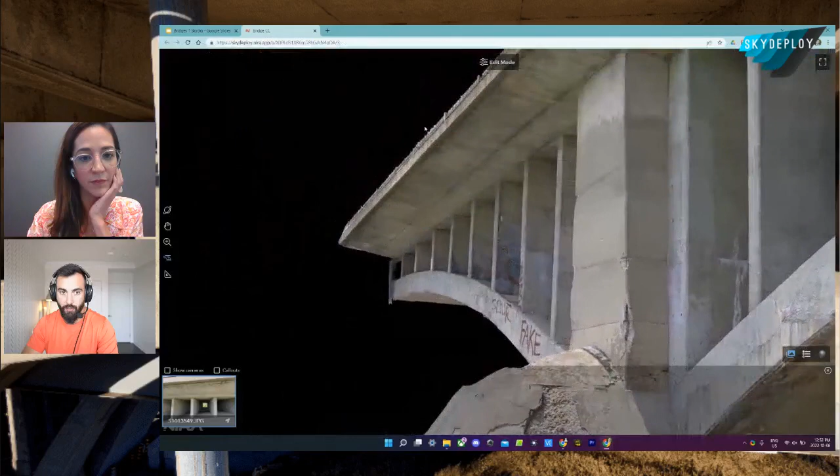And you'll see, if I fly to the other section of this bridge, let me just go through here. This section was in the shade, so no shadows. And then this section here was facing the sun at that moment. So we waited for the sun to be almost as directly above the structure as possible, so we reduced those shadows.

But I think there is an element as well that we need to be realistic here. Like we can't pretend Sacramento, California is going to be sunny every day. So I think this is also something that needs to be happening on the software side, and they need to cope with these shadows. And I think they are already coping much better than 5 years ago.

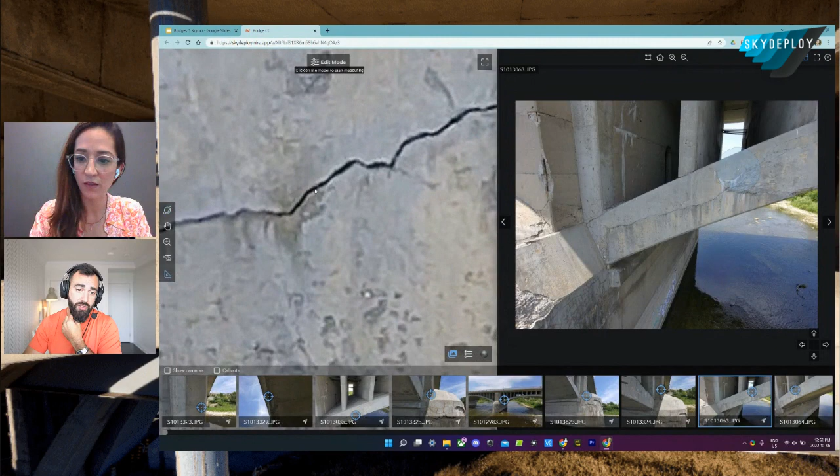Photogrammetry is getting so good. I'm really excited for its future because I can see that just around the corner we're going to have photogrammetry that's much more versatile and much more usable by people that haven't done it before. It's going to be very easy to break into.

But this, correct me if I'm wrong, but this 3D model, the one that we linked the QR code to, is made with context capture, is it? This is context capture. I found that in this example, context capture actually delivered some of the best textures. So I crowned it the winner, but the other four were really close behind.

I was just being very, very, very strict on it. And I just want to mention, from a Skydio perspective, we're fully agnostic and compatible with most photogrammetry software, from Drone Deploy, Context Capture, Skyline, GNext, Pix4D, Nira. So that's what I have, and I love it. I don't have to be tied to an ecosystem, because sometimes things work on one, don't work on the other. I don't want to be vendor locked from this side of things, from the actual photogrammetry side.

I like to play around, and then I like to test the same thing across many. So I love the combination of just doing it on my desktop. It's not hard, it's actually very easy. And then throwing it up on Nira, which is what you're seeing here, and it's device agnostic now. The data is in the cloud, it's very easy to share.

But if you need to do this for a lot of assets, a cloud solution is probably going to be better for you because it's one place for everything. I absolutely can't deny it, and I think we're also moving into that direction.

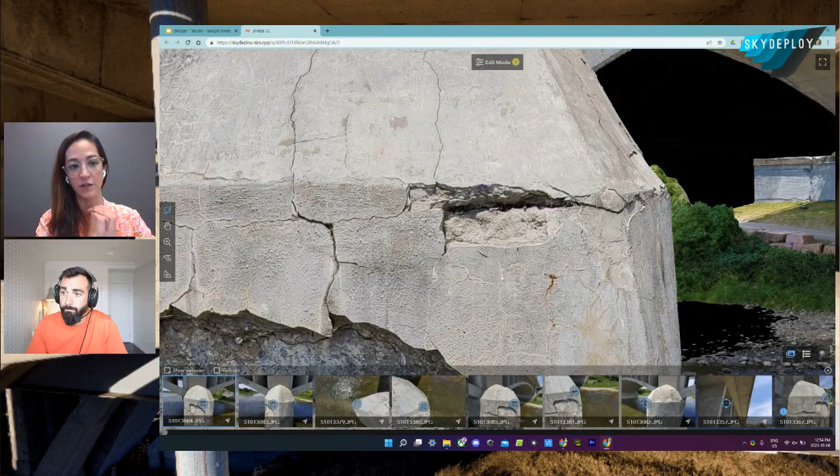Skydio has Skydio Cloud data sync, so you can automatically upload the data into the cloud. We already have an API integration with Drone Deploy, which means your data gets automatically processed once it's available on the cloud. So I think the industry is moving into that direction, removing the need for an operator uploading and downloading and clicking buttons.

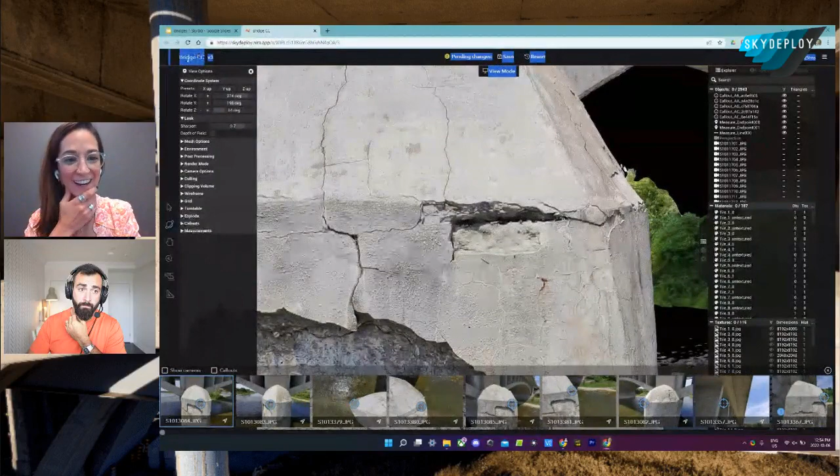So I'm seeing a few questions there. This is really interesting regarding accuracy and best practices for photogrammetry, control points, and accuracy. We'll be covering those in a couple of weeks, maybe three weeks. We'll need to get our agendas in sync again.

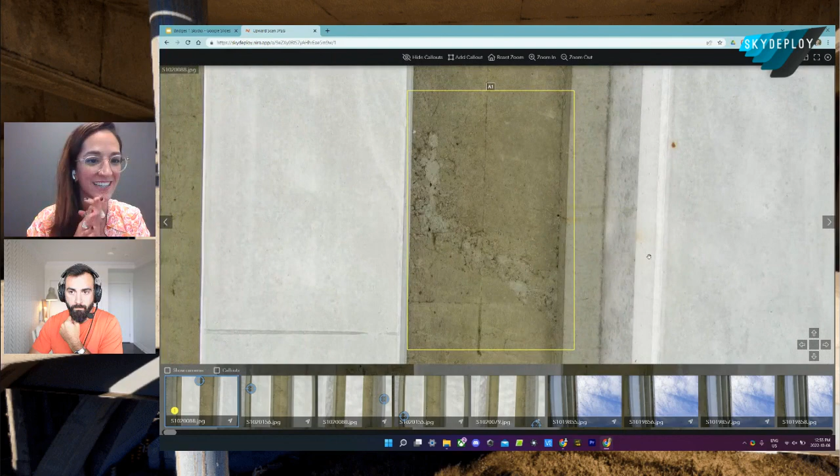Any comments or remarks, highlights, Ted, before we say goodbye? The purpose of today was really to show you guys how we do the data collection, the actual field work, and how this has completely changed that. There are areas like the underside of a girder, slab on girder, that we were never going to inspect with a drone before. Now we can, and we can even do this 3D scan, which I'd love to talk way more in depth on in the next one.

But at the end of the day, it starts with data capture. If you can't collect data well, effectively and efficiently, so you can do it over and over again without needing $200 an hour pilots who are only capable of doing it, that's the big win. That's where we're able to really get the demand for 3D data that we should be seeing, because it's absolutely valuable. You can get so much more info from it and store it so you can compare things over time. It's much easier to compare things when they're geospatial and you're doing it over and over again.

That's even more value starts coming out that way. Yeah, it's the repeatability, it's the safety - I wouldn't be flying any drone unless it's a Skydio in this environment. This is the reality. So it's kind of like removing the stress of the drone operator and allowing anyone to be a photogrammetry operator, gathering quality data in any environment safely. I think that's one of the biggest things I wanted to highlight.

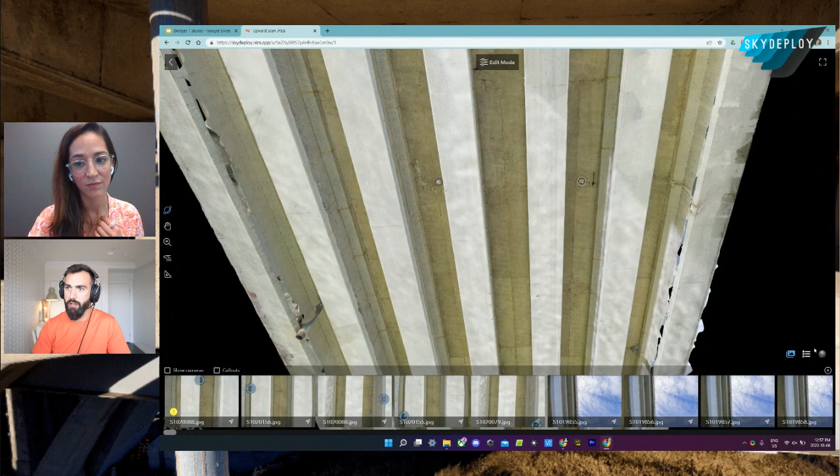One thing I want to add is that sometimes the problem can also be getting all that data from the drone into your computer, making sure you don't lose an SD card and poof, there goes your whole inspection. So Skydio Cloud - I haven't used it before, but I can see that being a big win for organizations with a lot of these drones. You really got to keep things organized, and the ability to upload straight into the cloud into something like SkyDeploy or one of those cloud softwares is pretty awesome. Definitely value there as well.

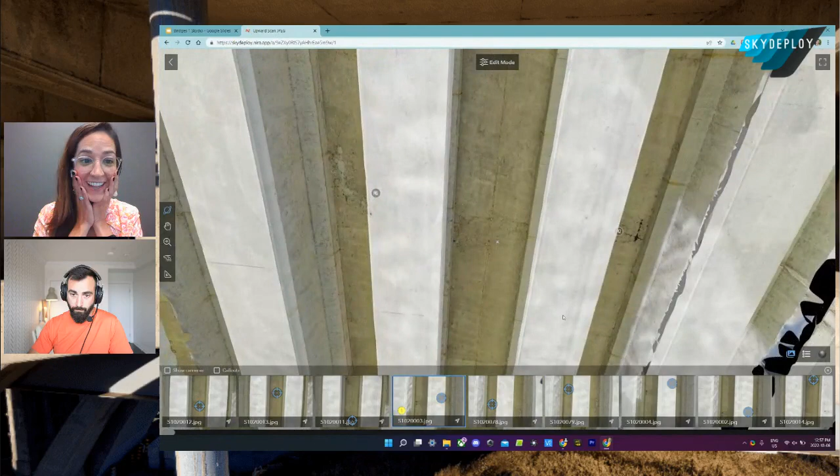Yeah, that's a very good point. Well Ted, anything else? I got a lot more, but we'll leave it there.